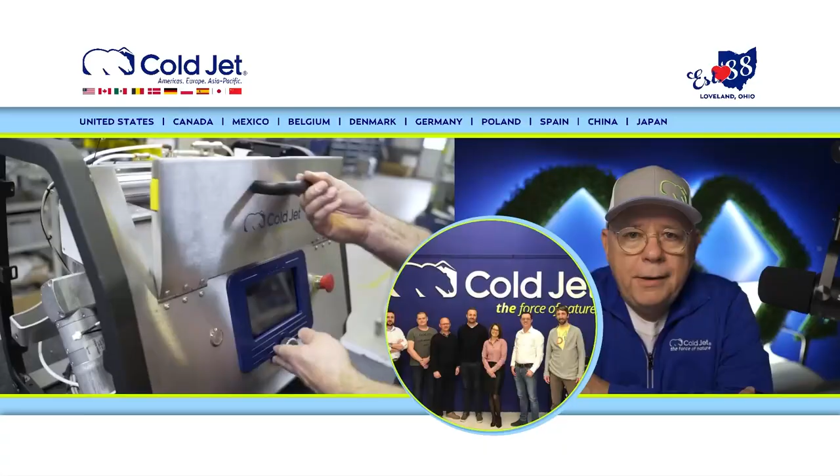We also have a warehouse where we store parts, and we staff a whole team of service people to answer phone calls from around the globe on issues you may have. We also have bricks and mortar and staff in Belgium, Germany, China, Japan, Spain, Poland, Mexico, Denmark, Canada, and in the US on the West Coast, we have a place in Rancho Cucamonga, California, of all places.

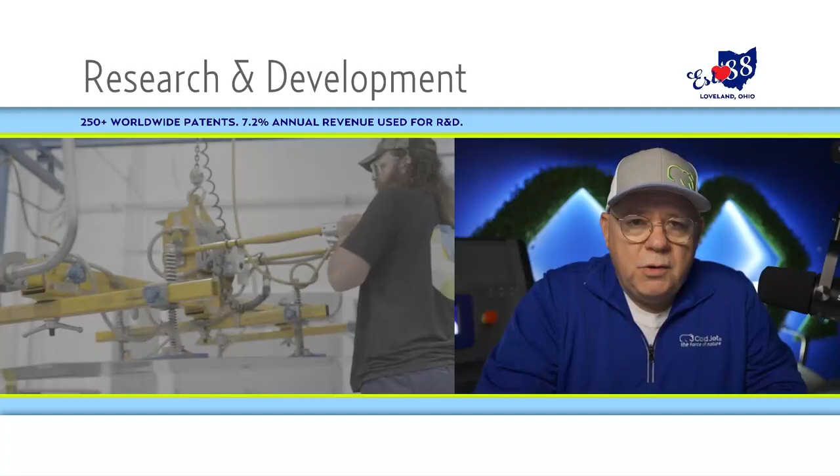The way this all started was back in the 70s, the government was giving away all this federal research money for companies that wanted to find better ways to strip paint from commercial aircraft. The process to strip the paint off of a 747 included a lot of chemicals and work and disposal and treatment of those chemicals. And so Lockheed Martin had gotten their fingers in that money, and they assembled a team and they came up with several processes, this being one of them.

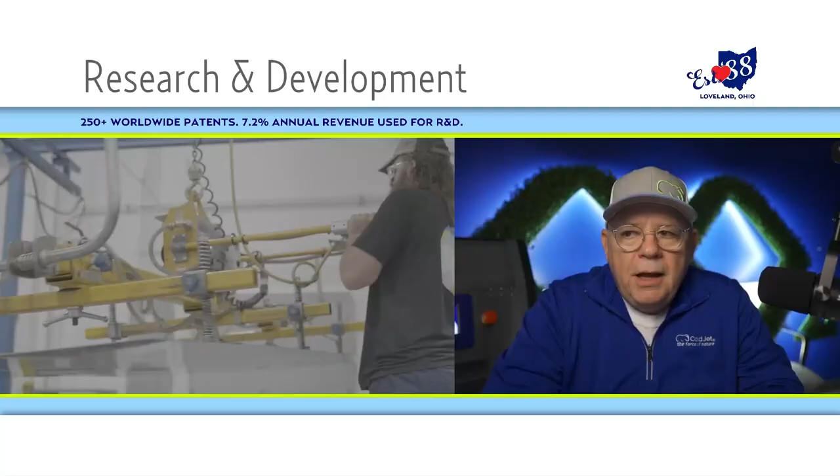And also from that school came walnut hull blasting and cornstarch blasting, and they even tried popcorn and all these green technologies. But this one, they really wanted to work because it had zero secondary waste stream. And the only problem was it didn't work. Dry ice, we learned, does not strip very good paint. Aircraft paint is good paint. Nor in its infancy did we really understand how to manipulate the pellet to get it to gentle up, because at the time we were throwing pellets at the skin and we're dinging up the aircraft. So this was just not going to work.

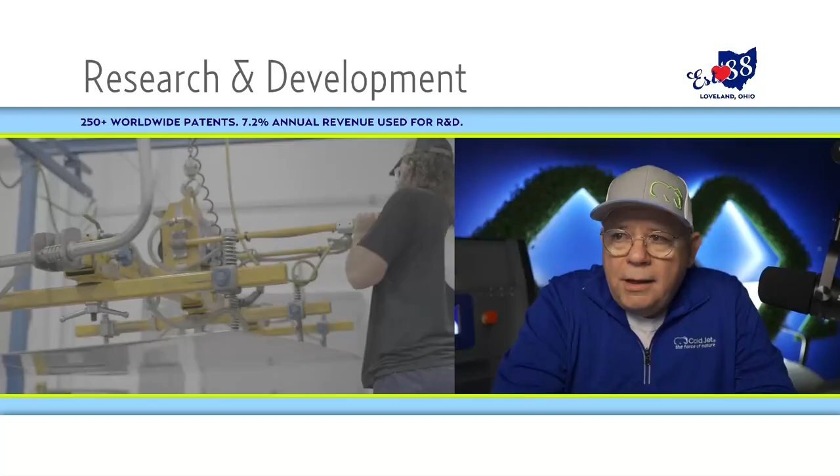So some people on that team knew some people in Cincinnati, Ohio that could build stuff, and they got some funding and built a Cold Jet. And back in those days, it was about the size of a UPS truck. It had to make ice and it had to drive around on the back of a semi. It was a big deal. When I came here, the super mini model was the size of a Volkswagen, and it weighed about 3,500 pounds. So we've come a long way.

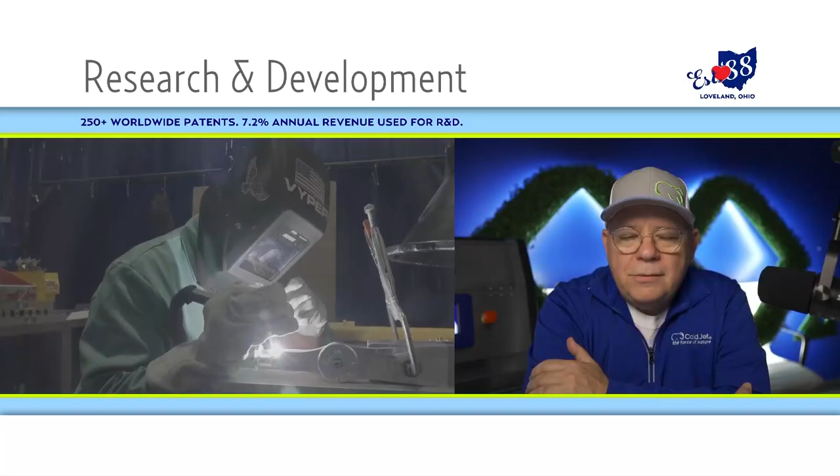But what I wanted to say, the R&D dollars that have been spent on this technology by this company have brought us where we are. Without it, this would not be a product. This would not be an industry. This would not be technology that's used anyway.

This is for the occasional user, and or the hobbyist. You wouldn't believe the buildings I've walked in to see people's car collections, and this is what they want to buy to clean their own equipment, and God bless them.

The next in row is our Aero line. This is super heavy duty. This thing is all welded steel, 18 gauge stainless, foam filled pneumatic, flat free tires. It's got a great big motor in it, so it'll last you 10 years. It has multiple agitation, which is important. The hose, the applicator, everything has to be super heavy duty.

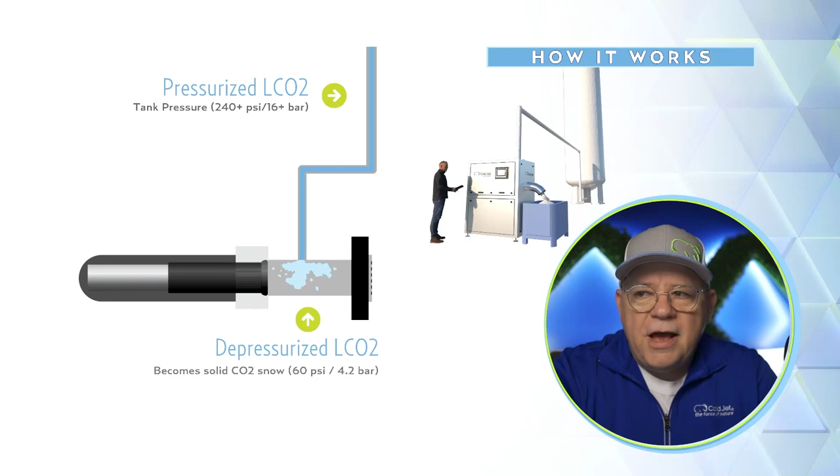And when we inject the LCO2 into that barrel and it experiences the atmospheric pressure change, it flashes into a snow. And as it fills up, a snowstorm begins to go on there. When it's full, that activates the ram and piston, and it packs that snow into a cake, and it shoves it through an extrusion die, or we call it a spaghetti die because it looks like pasta when it comes out.

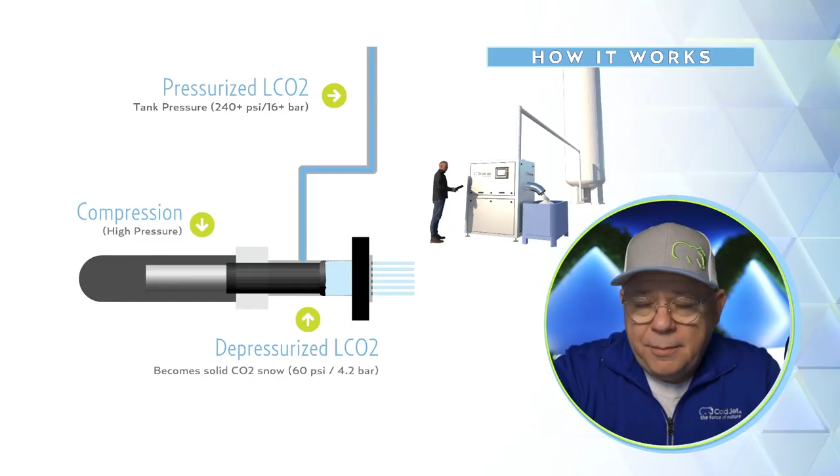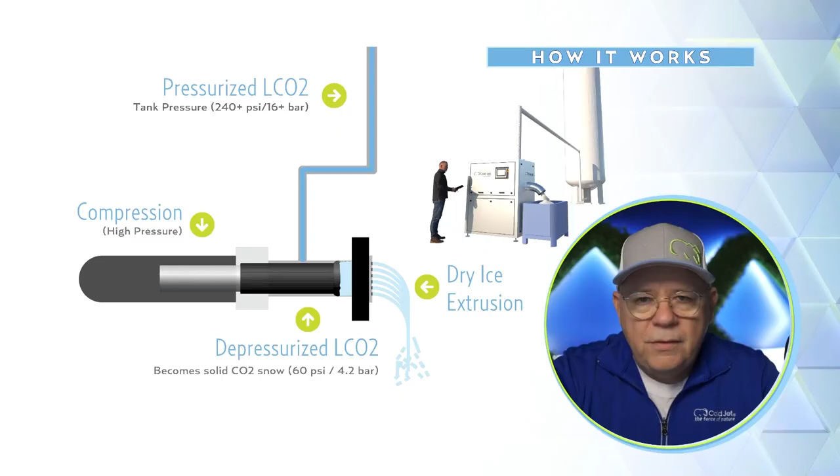And as it falls out into the box, it's brittle, so it breaks into shorter pieces, giving you a more uniform 3 millimeter pellet. So if you look there, it's falling into that blue box. Those boxes keep the dry ice for a week. Now you do lose 4% of the product a day just to natural sublimation, but it will keep for a week. So you get a weekly delivery of dry ice, however many boxes you're going to use, and then the next week they pick up the empties and bring you new ice. It runs very smoothly.

How do you get it? Okay, well, our sales staff can show you exactly where to go for your particular location, but it comes from an industrial gas house, Airgas, Praxair, one of these guys, or you can just call a welding supply house. They usually have it too. They have a lot of CO2 on site, so often, not all of them, but a good deal of them make their own dry ice. And then there are companies that have just set up the equipment to make and deliver dry ice, and we call them independents.

Dry ice here in the States on a national average is 30 cents a pound to 80 cents a pound. To do industrial cleaning, most operators run about 100 pounds an hour. Okay, so if you're getting it for 30 cents a pound, that's $30 an hour to operate.

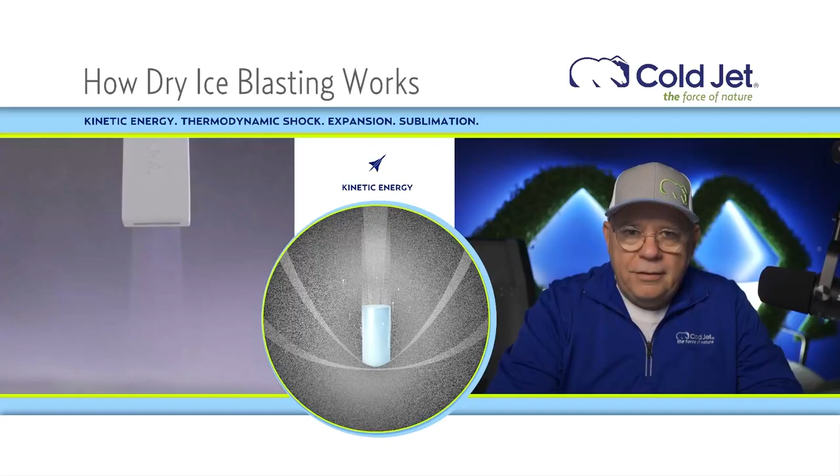Here's how it works. Okay, there are three things that make it work. So we load the pellets into the machine. The machine is then hooked up to your compressed air system. All right. And the machine meters the pellets into an airstream and shoots them out of a gun and nozzle. Three things happen. There is kinetic energy when the pellet strikes the surface. Now, we talk about it being non-abrasive. Abrasion refers to when you abrade a metal surface. We do not abrade anything, okay? But there is some scrubbing action.

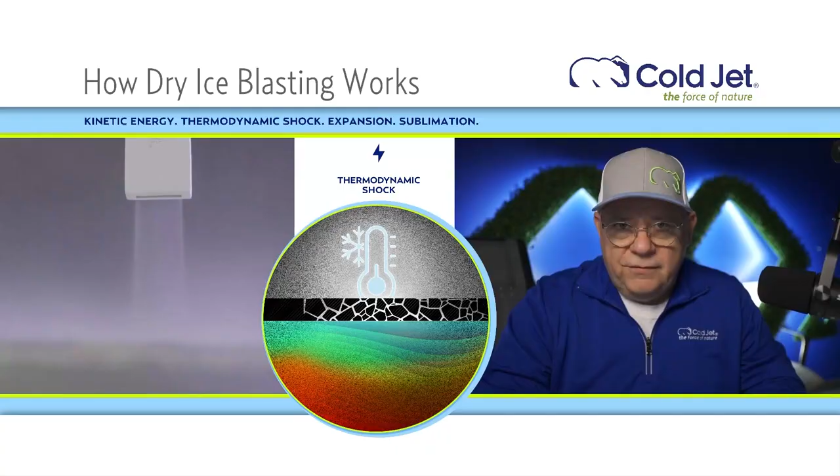Second, there is the thermal shock, and that is what happens when the contaminant, the dirt, whatever you're trying to clean, becomes cold faster than the substrate or the surface that it's stuck to. So it fractures and releases its bond. Okay. Then there's something called gas expansion. Now we've made that pellet and compressed it, and it has a certain hardness. When that strikes the surface and you force its sublimation, there's a bit of an explosion that happens, and it causes a lifting effect on the contaminant. Okay, so you have the impact of the pellet, the thermal shock, and the gas expansion.

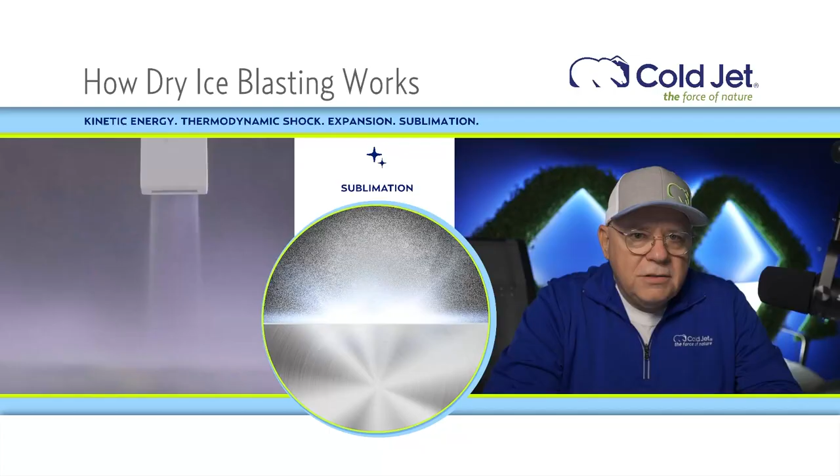The best thing that happens is it all sublimates back to a gas. You don't even see the dry ice. The only time you see it is when you're loading it into the machine. When it's coming out at 900 to 1,000 feet per second, all you see coming out is that vapor path. So there's no ice or pellets exploding and bouncing all over and interrupting the workspace or bouncing onto the operator, making him unsafe. Frankly, this is the most popular job in the plant because it's nice and cool, and so is the operator.

Okay, there's something called the Mohs hardness scale. This is where they measure the hardness of aggregate against a scratch test if they're going to test something. So on the Mohs hardness scale, talc is a 1, diamond is a 10. Well, dry ice is about a 1.5. Your fingernail is about a 2.5. All right, so that tells you just how gentle it is.

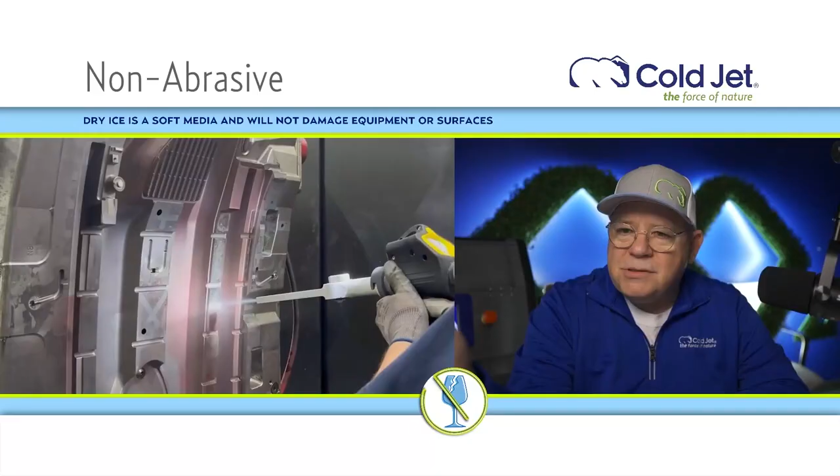So this guy right here, which you found out earlier happens to be me, is cleaning a mold that makes a dashboard. This mold is rather delicate. It's very expensive. That might be a $1 million mold. And after you make so many parts, it gets fouled because there's an off-gassing or a chemical that leaches out of the plastic. And if you don't clean it, the part looks funny and it gets a funny gloss level on it.

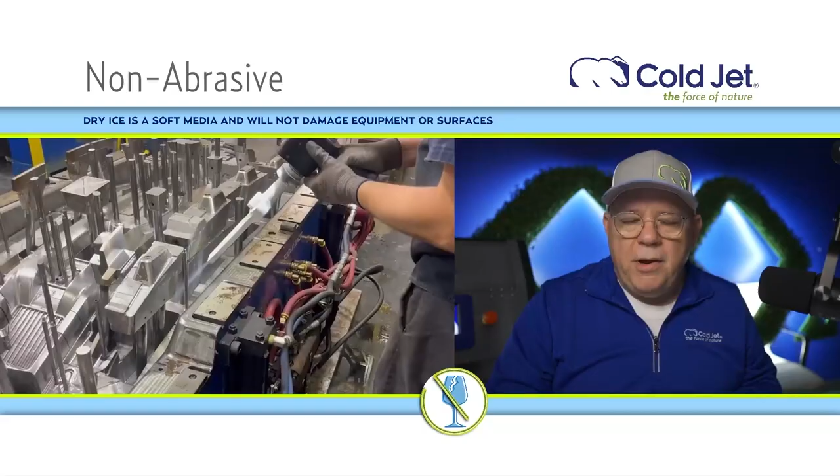Well, the last thing you want to do is go in there with something hard, because it's going to tear that mold up, and now it needs a very expensive repair or maybe a replacement. And like this one, you have all kinds of tricky geometries you can't reach, so doing this by hand is very tricky. Again, no water, no chemicals, no disassembly, and it's just a breeze for the operator.

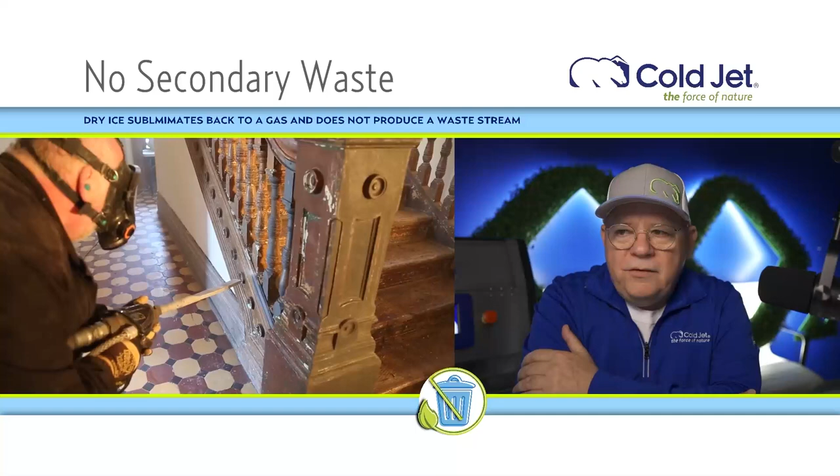Okay, this is a prison in Ohio. This is where they filmed The Shawshank Redemption. That is a cast iron staircase that has lead paint on it. The paint's coming off pretty easy because it's old. But normally, if you cleaned that with a traditional blast media, let's say sand, you would have piles and piles of sand that's now contaminated. And all that gets loaded into a 55-gallon drum, put on a truck, and it goes off to the landfill.

Now can you imagine how much contaminated sand you've got to put in the landfill to do the entire prison? If you use dry ice, the ratio of contaminated sand to just paint chips is like 50 barrels to 1. I don't know what it is now, but about 10 years ago I checked, and it was like $2,000 a drum to put it in the landfill. If you start doing the math, this adds up very quickly. So it's no secondary waste stream.

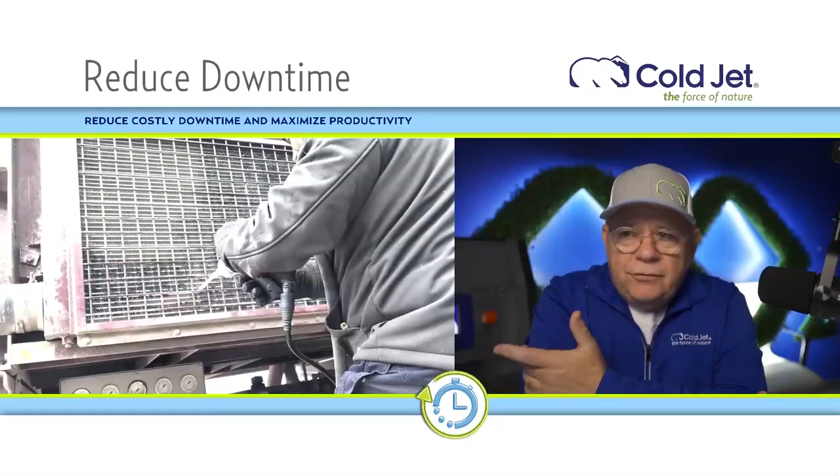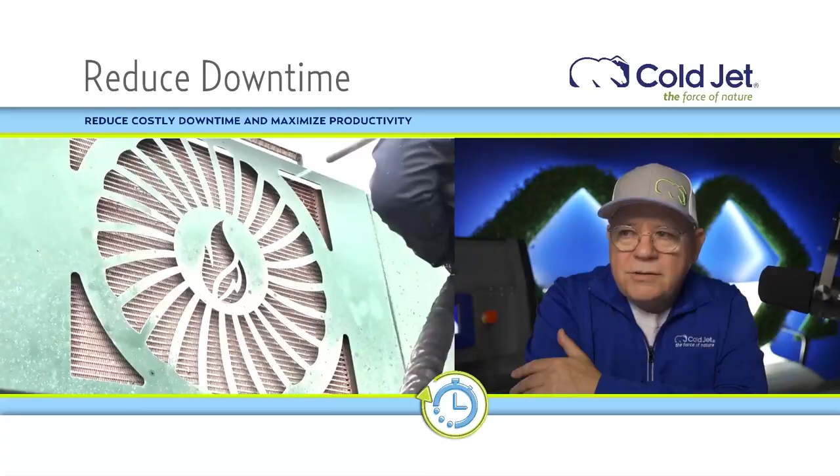Reduction in downtime. So what this guy's doing is that is a big heat exchanger or a radiator that is cooling all of the equipment used to extract oil out of the ground. So they might be extracting oil, maybe it's natural gas, but they're mining. And if that thing gets clogged up, and it's outside and it's dirty and it does get clogged up, they have to shut the whole line down.

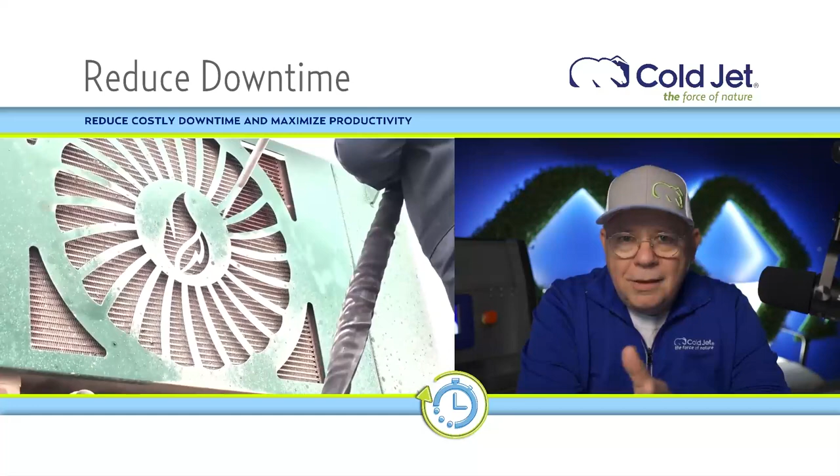All right. Now, this thing, they might be making $20,000 a minute, maybe more, maybe less. I don't know. But that's not the point. The point is they've got to shut things down. And now that money stops. Secondly, that radiator right there could be $5,000 or $10,000. So they have to replace that thing, and they end up sitting out in the field.

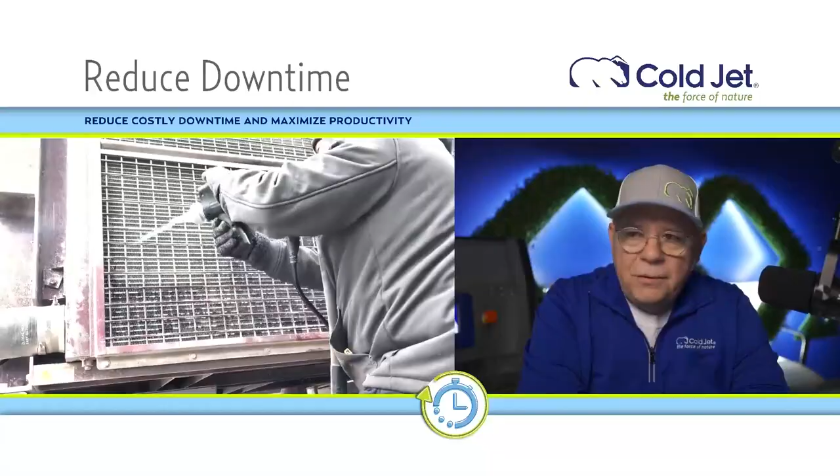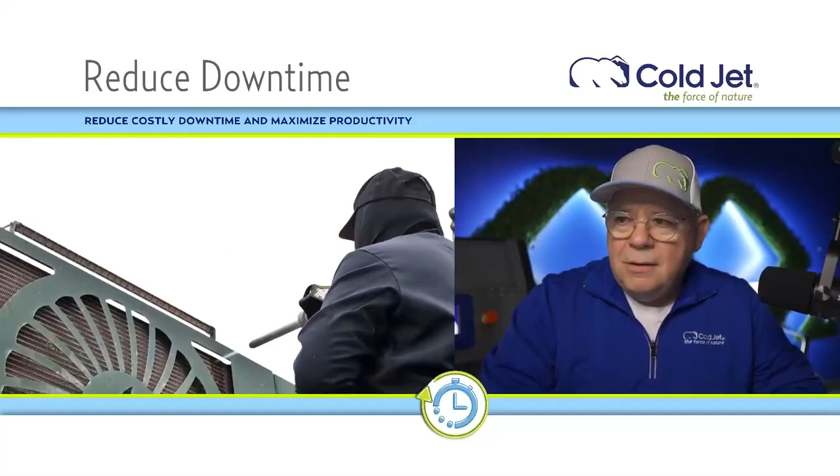If you look at that right now, you can see the dirt's coming right out of the back of that thing. So he's cleaning that thing while they're in production, instead of replacing that thing. And also, this again is a very pleasant job for the guy that's got to do it, as the alternative to swapping it all out and replacing it.

Okay. And then we talk about ancillary applications. Most manufacturing plants buy this to solve some production problem. Okay. But almost always you have a little dry ice left over. So you go around and clean stuff. There's all kinds of stuff to clean.

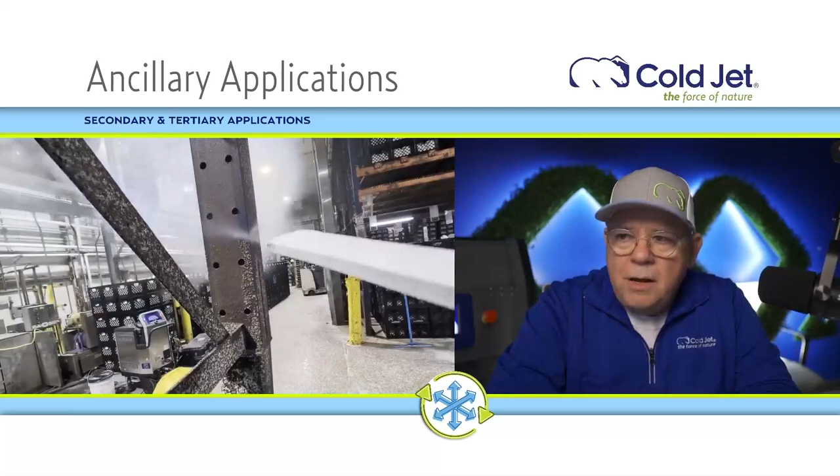Materials handling equipment, fans. What's going on here is that's a dairy. And that milk has gotten all over the pallet racking and it's dried up, but it stinks and it's spoiled. And if they go get a steam cleaner or a power washer and power wash that off, it just reactivates it. And then it makes a huge watery mess with food and bacteria in it.

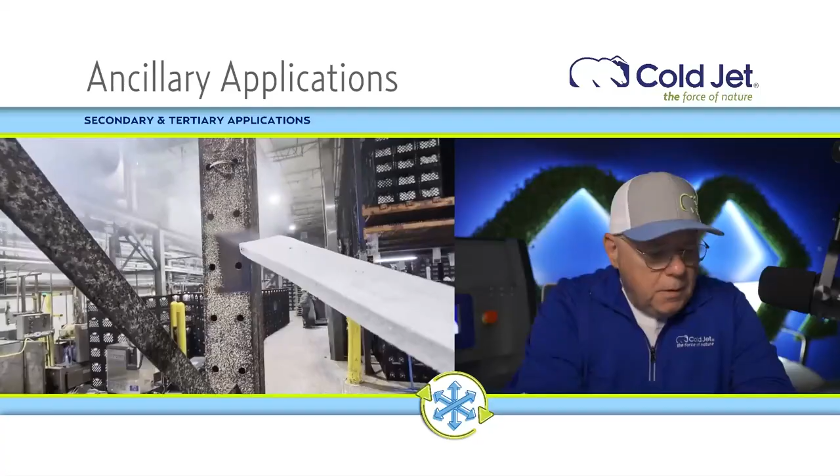This guy has got a forklift covered in dog food. All right. Now, if he is going to power wash that thing off, that dried dog food now starts to make its own gravy. Okay, and it gets all over the floor. You got to corral it. It ends up in the sewer. It stinks. But it's not only that.

There's an individual that has to sit in that forklift and drive it all day. And the dog food gets all over the steering wheel, the seat, the controls that he uses to manipulate the rack, on the pedals. And then the forklift is driving all over the plant delivering this bacteria. When the inspector shows up, they go right over to that forklift and start to swab it. And because it's hard to clean, often it doesn't get done. This makes it easy to clean.

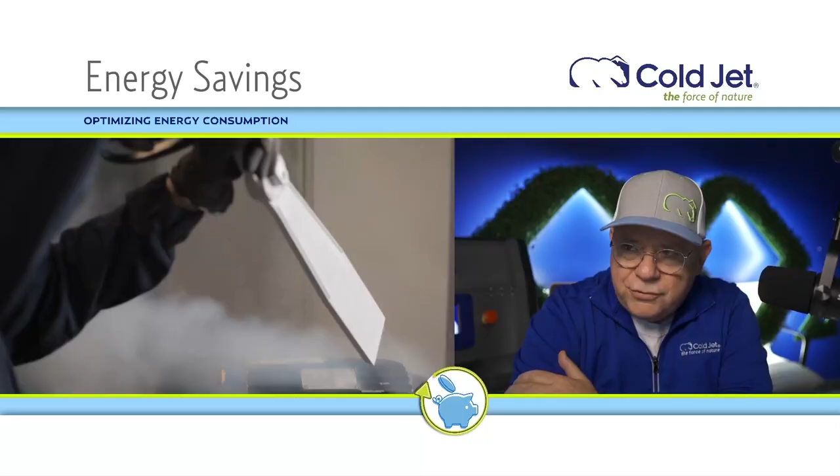I like this one because I'm one of those guys that will make everybody sit in the dark and watch TV because I don't want to pay the electric bill. This motor is designed to self cool itself. Okay. Because you got those fins there, and behind that shroud right there there's a fan in there. And that fan is designed to pull air across those fins, and that's what keeps it cool. Well, people don't ever clean these things because they don't want to get them wet.

All right. And if you remove that, they call it a bell, but if you remove that shroud underneath there and look at the fan blades, it doesn't look like fan blades. It looks like three chicken wings. It's not pulling any air across those fins. Now, what happens is that motor runs 3 to 5 amps higher than it should, more than its design point.

If you go into a plant and start counting motors, you might have 2,000 motors in there, maybe more. And if you've got 2,000 motors and they're all dirty and they're all running 3 amps higher than they're supposed to, that could equate into $20,000 a month in electric bill that you don't really need to be paying. You can take your extra dry ice and just go around and clean these motors and these control panels.

These are everywhere. They get dirty, they get gunked up, they cross conduct, they get hot. The poor guy that's got to PM this thing has got to wade through all the dirt before he can start to work on it. Because it's non-conductive, you can go through and clean all this stuff without any water, chemicals, or disassembly. It's beautiful.

Okay, the overall equipment effectiveness. This is a score that is given to a piece of production equipment. Okay? It's measuring: is this thing running as fast as it can? Is it producing as many parts as it can? And of those parts, are they all good parts or are they scrap? If all these things line up and you get 100% score, you're doing well. It's almost always an impossibility. It's just a struggle to make it.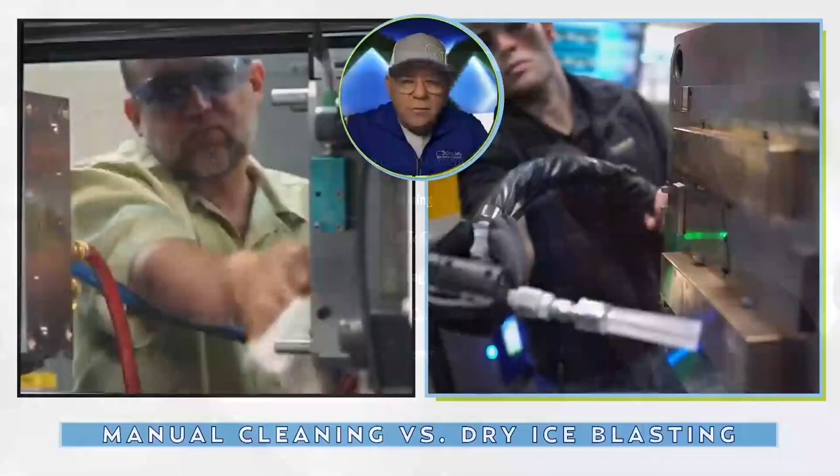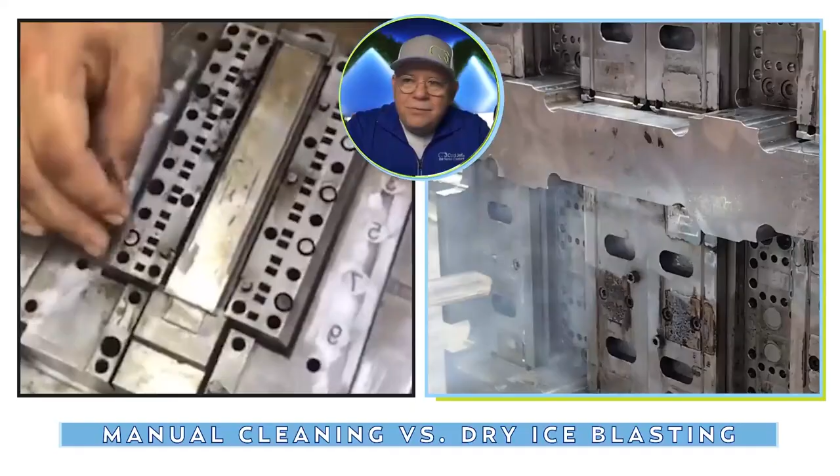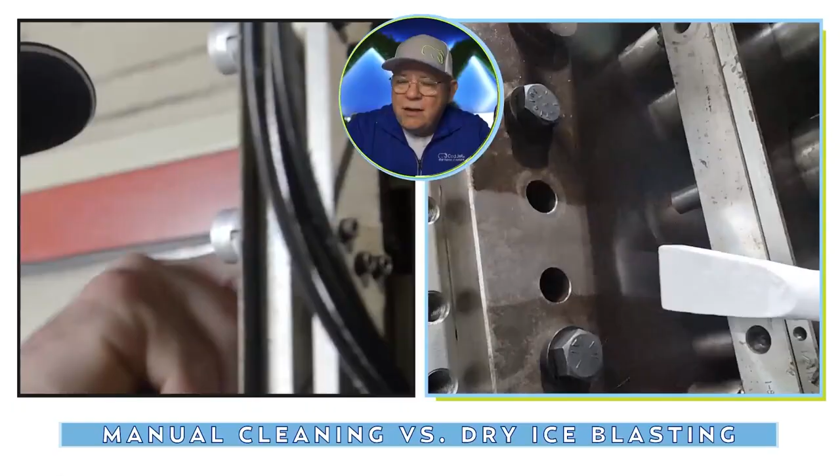Manual cleaning versus dry ice blasting. And look at this guy on the left who's got to clean this mold so he can get this production line going. Doing this kind of cleaning never gets the mold 100% clean, and it's arduous. It's like flossing a cat. All right, look what's going on the right. It's nice and cool. It's getting every nook and cranny. It's doing a complete job.

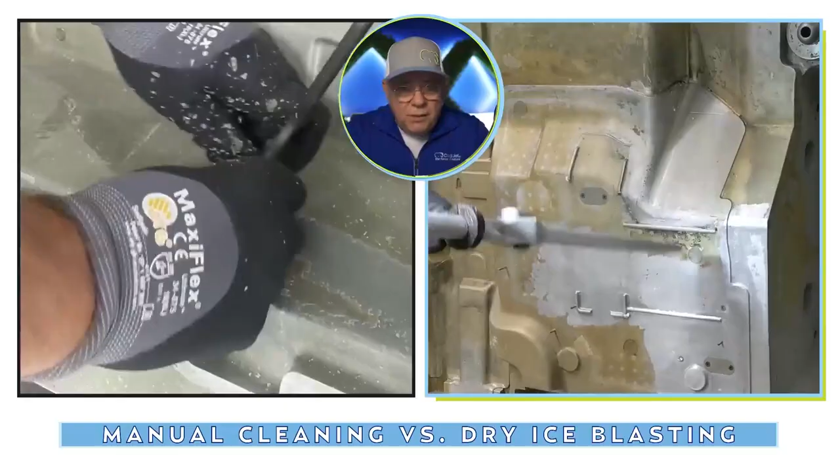That guy on the seat on the left there, that is a mold that makes a car seat, and that's wax on there. And when it wears out, you gotta scrape it all off. The guy on the right, pulling it off like butter. It takes hours to clean one of those seat molds traditionally. You do it with Cold Jet, 20 minutes, 10 minutes.

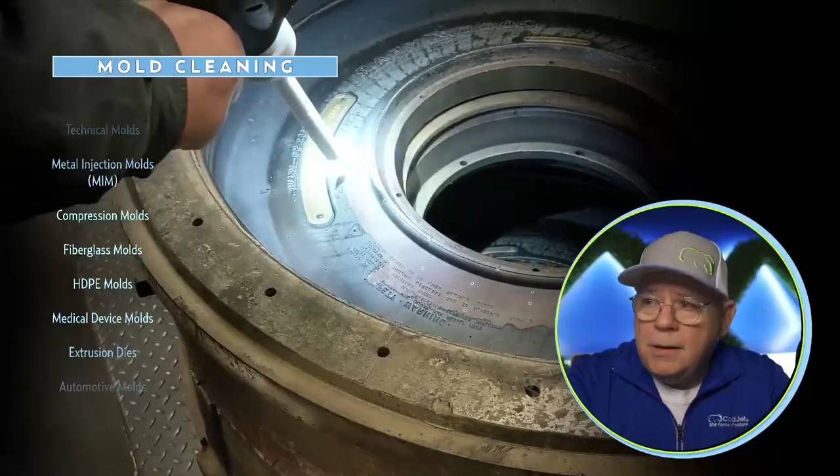Way back when, we cleaned a lot of molds. Back when I started this thing, the tire industry was big on this, and the process to clean a tire mold, and the reason you have to clean it is because after you make so many of them, the tire mold gets dirty and it doesn't make a tire. So they have to cool this thing down. It's 380 degrees. It's a big, heavy mold. Even a passenger tire is about 300 pounds.

So you have to unbolt it from the press, and then you bring a crane over and you take it over to this area and you sandblast it, which is a problem because the sand doesn't like the aluminum and it wears the lettering. So that mold only has a certain life. Every couple of years, you've got to replace it, and they're expensive. Then they bring it back, they heat it back up, bolt it, that whole thing. This takes 13 hours. I can clean one while it's hot online in about 11 minutes.

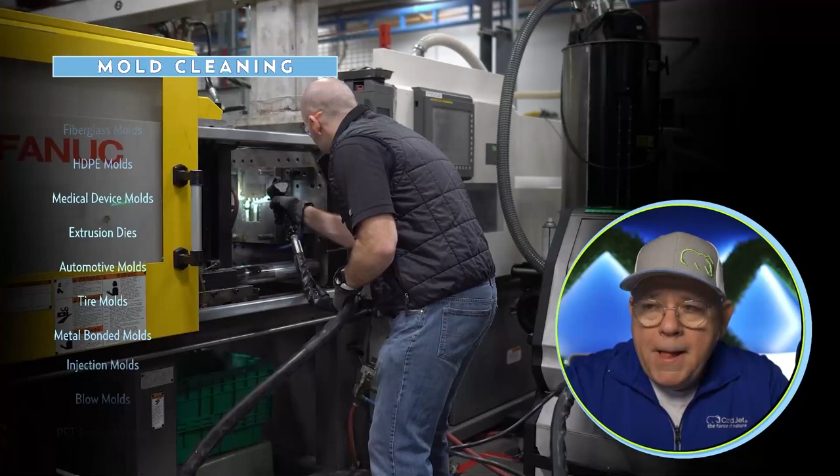Well, this is what it means to the tire maker. The tire maker now makes an extra 3,500 tires per press per year with zero tool wear and no landfill. Well, that is a remarkable deal. But it's the same thing with any molded products. I don't care if you're making Barbie doll heads or dog bowls or cell phones, or anything on a car. From bumper to bumper, it's all made in a mold or a stamp or a die or a casting. All of them get cleaned. All of them are hard to clean. This makes it easy.

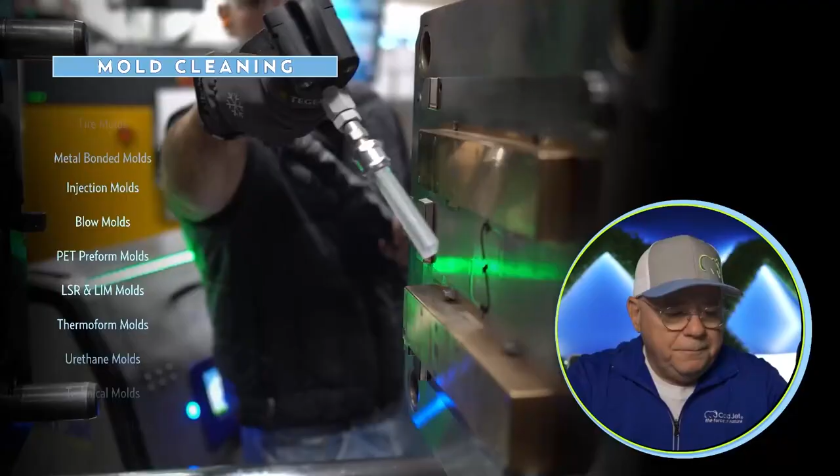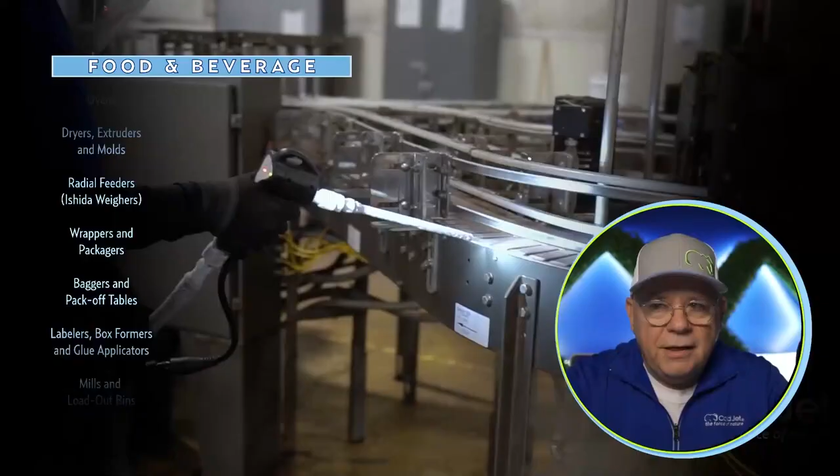The food and beverage industry loves us. So you take a soda can, a beer can, something like that. From the beginning, you got to stamp it. The stamp gets cleaned. It has to be decorated and printed. That gets cleaned. You have to put a coating on the inside. That gets cleaned. Then to fill it, soda, beer, fruit juices get slopped all over. They get these chains all sticky, and the wire harnesses, and that threaded thing right there.

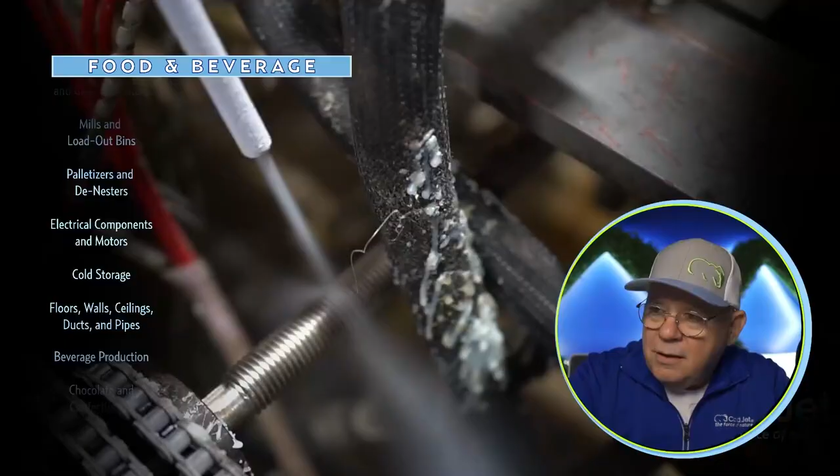And look at that. It's been there for 100 years. Nobody's ever cleaned it. They clean it just enough to get it passable. With this thing, you can clean everything without messing up the line. I mean, that thing has never been that clean. And then when you're cleaning from the food side, there's an enormous amount of water that's brought in.

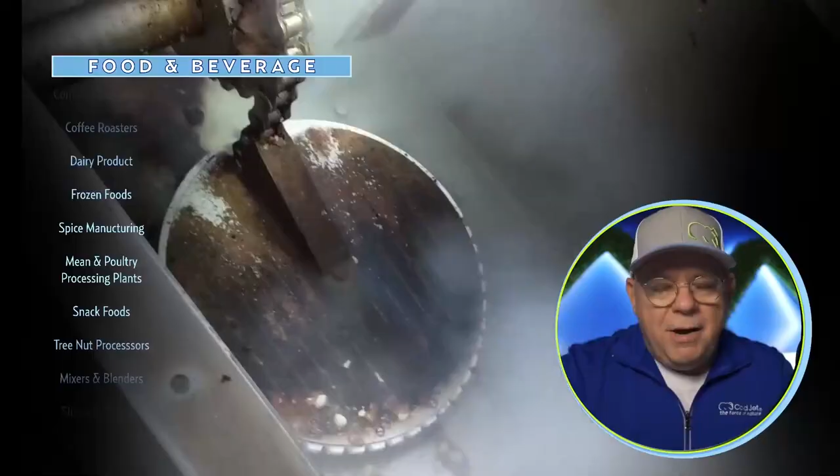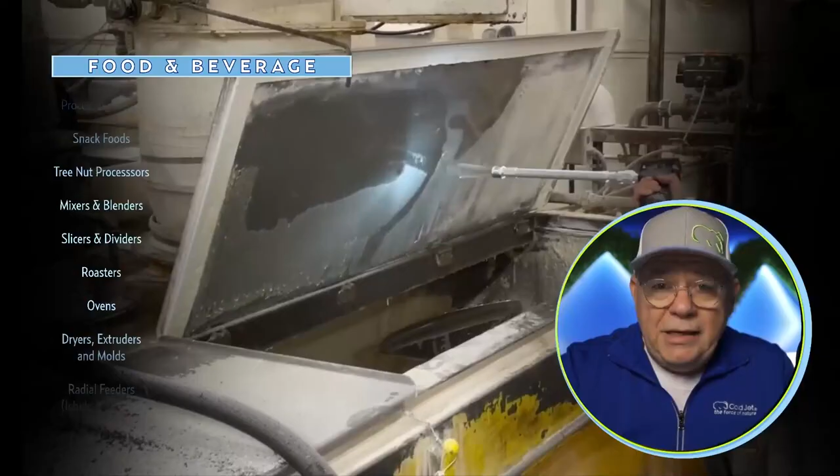What that is, that's a nut roaster. And that thing gets the oils burned onto that plate. That whole thing has to be disassembled, cleaned with caustic soda, reassembled. It takes days. Not only that, the harsh chemicals they use de-season the roaster, so the peanuts taste like Easy-Off. They have to throw them all away until it starts to season again.

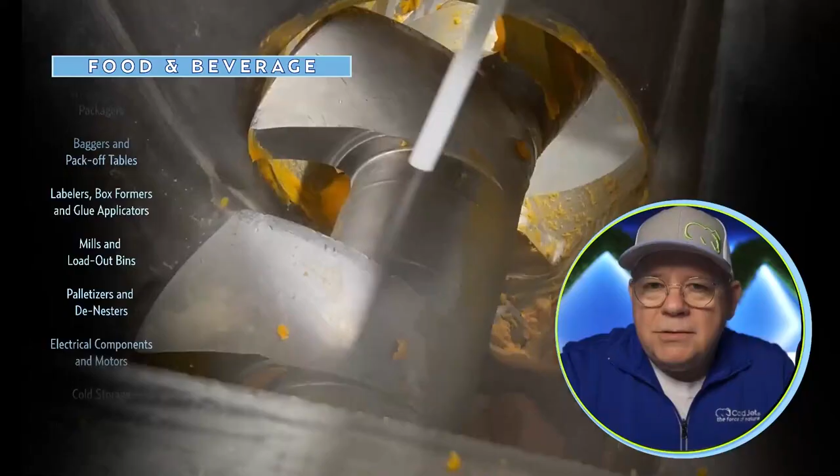But anyway, in this mixing and stuff, an obscene amount of water is brought into the plant to make the ingredients, but 40% of it is used for cleaning. If you can reduce your water consumption, because the world's running out of water, if you can reduce your water consumption and sewage costs and water treatment costs by 40% by using a byproduct, you really have something there.

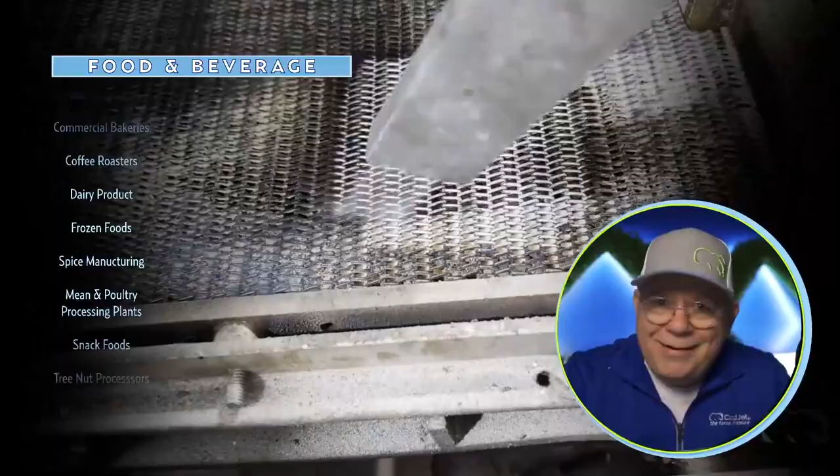The other thing is, because there's electricity and moving parts in here, you've got to take it all off to wash it. You can clean things just while they're right online. And that is a big deal.

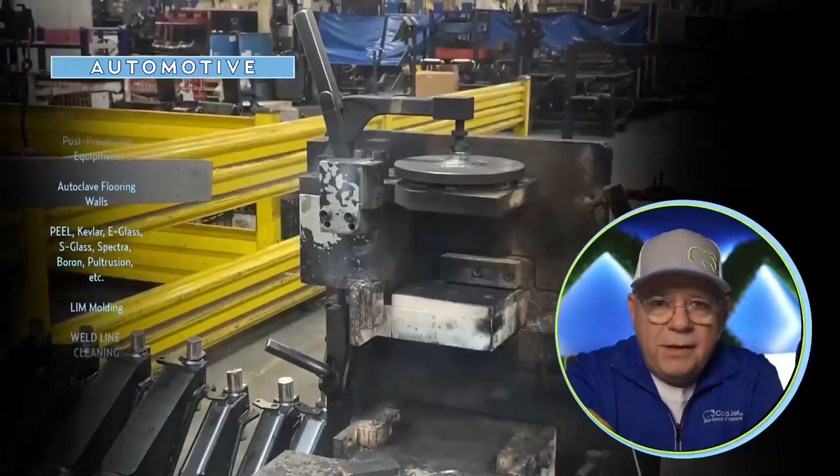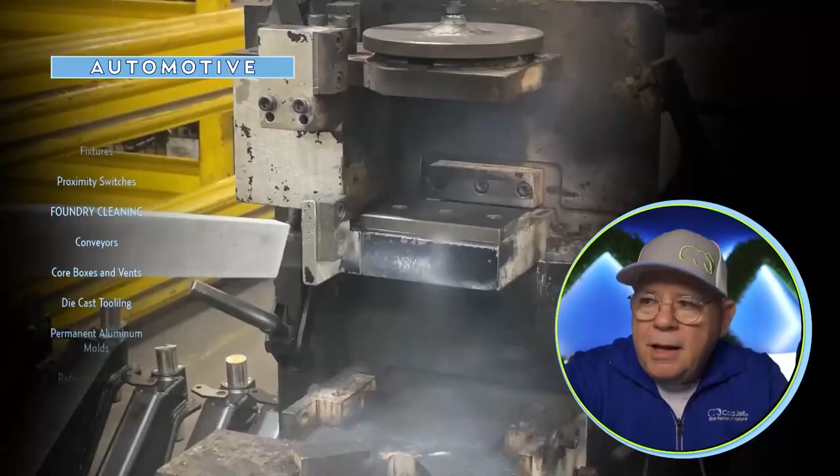Okay, automotive assembly plants. So, where they're putting together the Cadillacs and Hondas and stuff like this, there's a lot of welding and stamping and painting. Okay. Welding, you may have seen a video of those lines of robots and their sparks flying. That's welding. And those sparks flying end up back on the weld fixture. That's a weld fixture right there. It holds two pieces of metal, robot welds it.

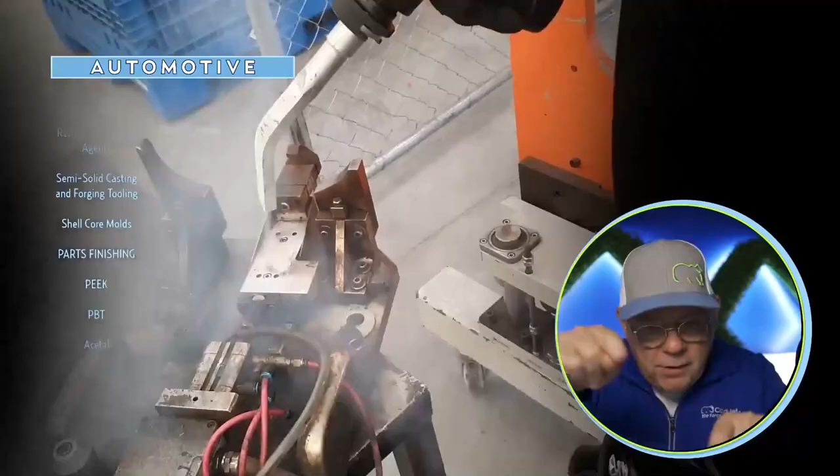When it gets built up with dirt and spatter, the part doesn't fit in there, and then the electronic sensor won't tell the robot to come down and weld it. That's a bigger one. So guys have to go down there with hammers and chisels and chemicals and hammer and chisel all the stuff off of this thing. This takes an obscene amount of time. And it's also very difficult on this expensive tool and the electronics. All right. Dry ice, you can do it in a matter of minutes.

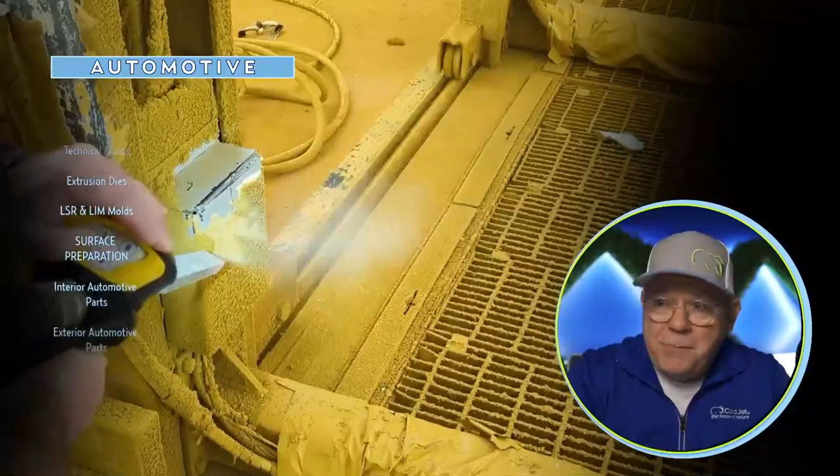You might recognize that color. That's Caterpillar. That is a downdraft paint booth. So the overspray gets drafted down through the grates in that floor. And then there's a stream of water that collects it and takes it to sludge it out. If you don't clean that thing, the air can't get through and it burns up the fan. So we clean a lot of these.

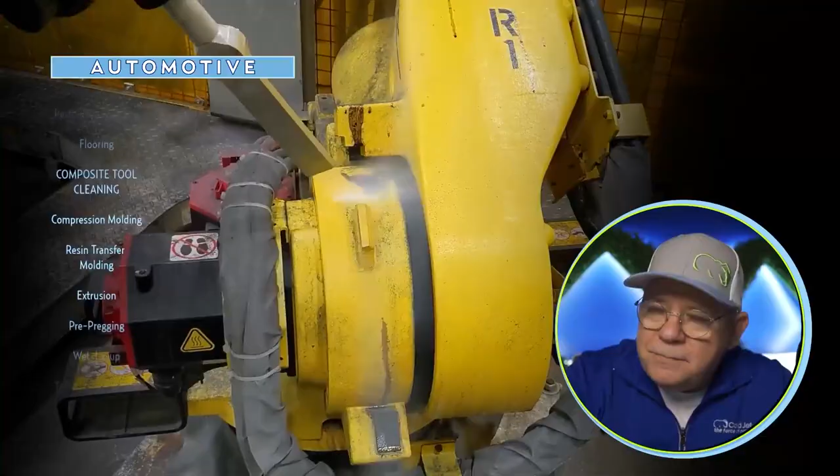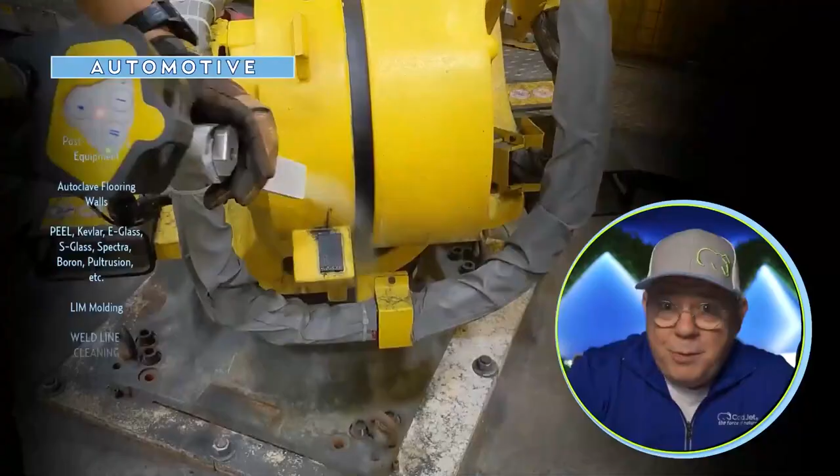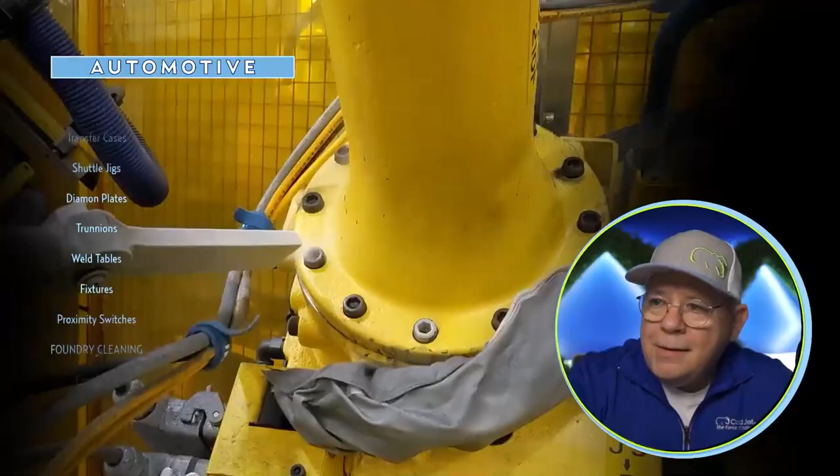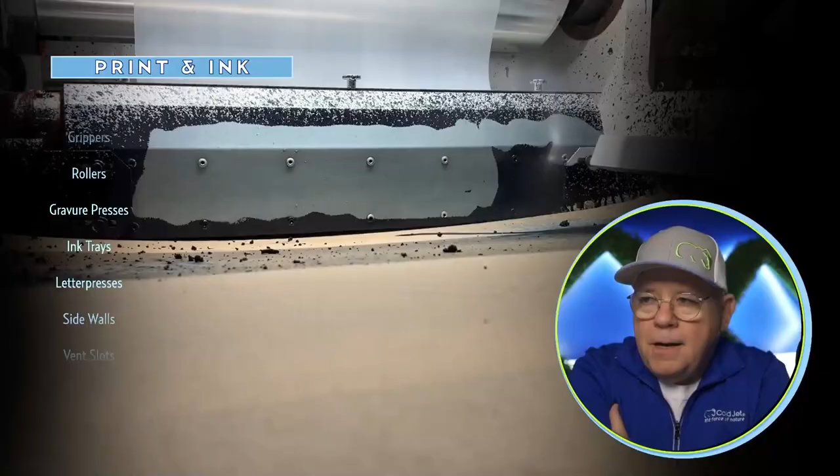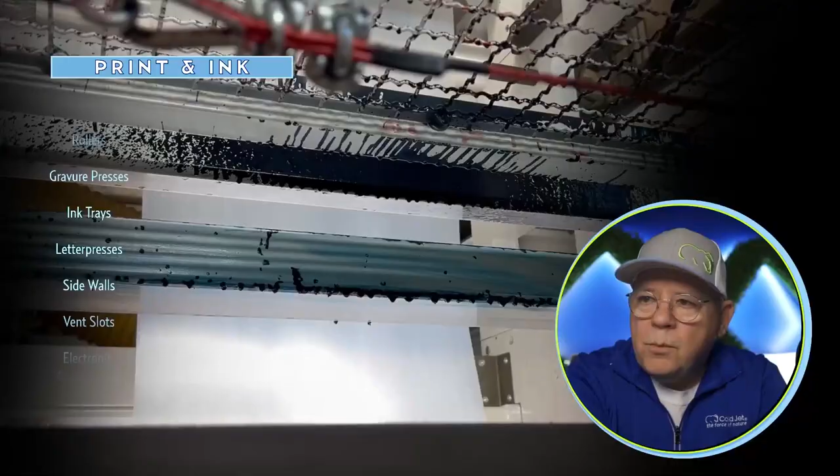Printing. If you've ever seen a big commercial printing press, it might be as big as a football field from one end to the other, and it's tons of moving parts, chains, gears, electronics, and then it gets inundated with ink and glues and carton dust or paper dust that just gets built up. And when it comes time to clean it, there's a team of people that run that press. Well, they got to go get the scrub brushes and the scrapers and some super harsh chemicals and rags, and they start cleaning it. And again, it gets clean enough so it's passable. And all those rags and things end up in the drum and they end up in the landfill.

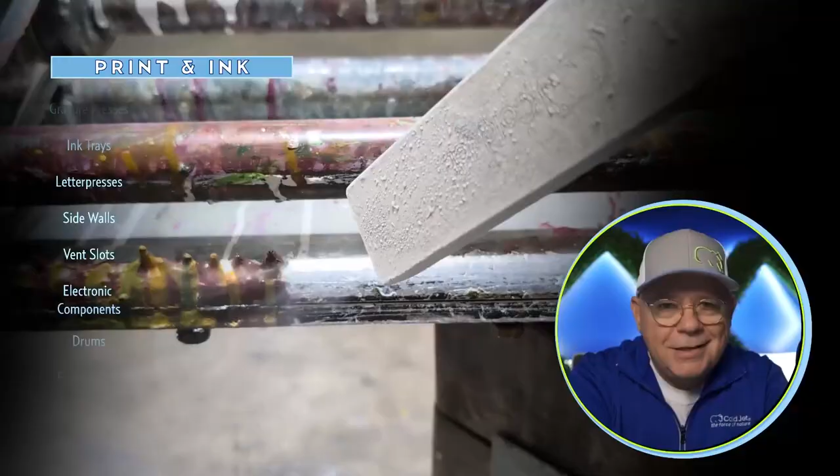Now, inks respond well to thermal shock. Okay. And what you're watching right here, that is some super thick ink. And that's a good example of the impact and gas explosion because there's a lifting effect. And sometimes the thicker the contaminant, in this case, the ink, the faster it comes off. See what I mean? But again, to the guy that's got to clean this thing, this is the best job in the plant.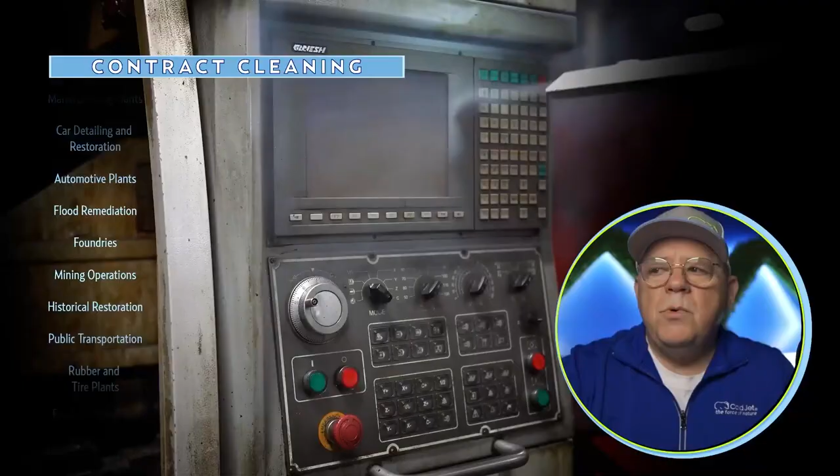In this case, these guys decided to go and clean all their CNC equipment because it's very old and very dirty. And they found that when they did good housekeeping and cleaned their equipment, the morale in the plant got better. Attendance got better. Heaven forbid a guy has to come and run this machine all day and it be a filthy mess. Also, everybody gets one of these man fans, especially in a plant that's hot, and they get dirty. And when they get dirty, they get off kilter and they're out of balance and they're hard to clean. You can clean them while they're right online.

This is fire soot. They had a fire in this building. Okay, if you don't clean it, the whole building stinks like fire for the rest of your life. So oftentimes they have to rebuild, but you can cold jet all that fire soot right off.

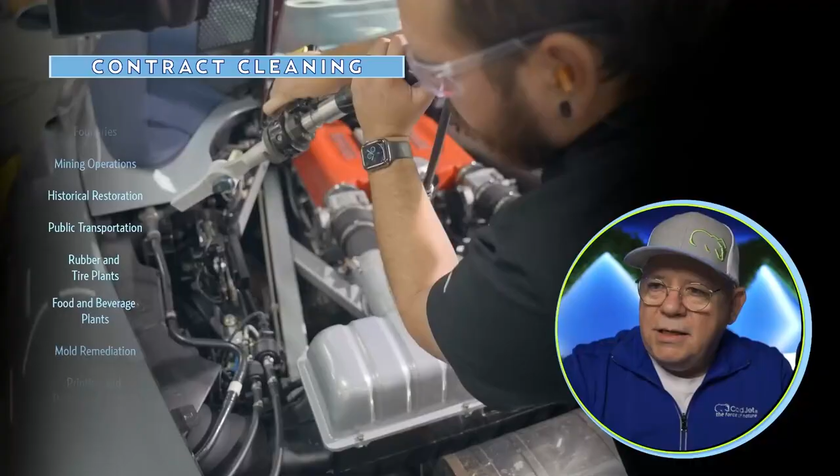This guy is cleaning his Ferrari. For the detail shop that's going to do this, this is awesome because again, cleaning a Ferrari by hand or any car is like flossing a cat. It's a long day of arduous work. If you can make short work out of it, the detailer can do so many more of them in a day's time than he could normally do.

And again, the applications go on and on. The contract cleaner. Okay, I'm going to come back to this. Okay, so